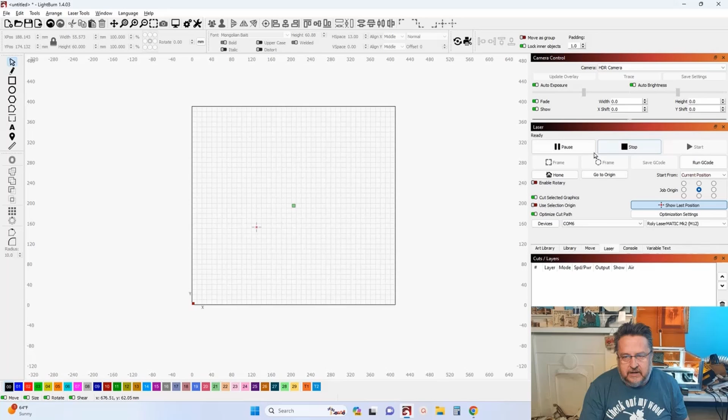First, we're going to talk about setting up the rotary in LightBurn, turning it on, and getting ready to use it. It's really not difficult. First thing you've got to do is get LightBurn opened up. Once you've got LightBurn open, if you have your laser menu open with your pause, start and stop buttons, there's a little switch that says Enable Rotary. You just click that, and now the rotary is enabled. That's all you've got to do—you're ready to use your rotary.

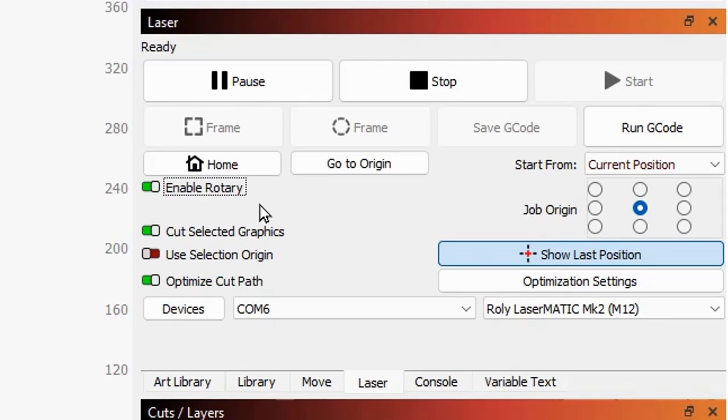Now for positioning the rotary with the MK2 and the chuck, you go to the move menu. In the move menu, you have saved positions. If you do the drop-down menu, you'll have rotary 1, 2, 3, 4, and 5. Those rotary numbered positions are for the friction roller, which has 5 different positions for the roller spacing, and those correspond to the center line for each placement of that roller.

If you're using the chuck rotary, you simply select chuck rotary and say go, and that sends the laser directly to the head of the chuck rotary on its center line. Let's watch that again—I'm going to send it back to home. Now all I have to do is select chuck rotary and say go, and she's at the center position in the chuck rotary, ready for you to send it down the x-axis to where you want the engraving centered.

Now let's talk about that. What is your origin—what are you using? Are you using absolute coordinates, user origin, or current position? Well, let's take a look at each of those.

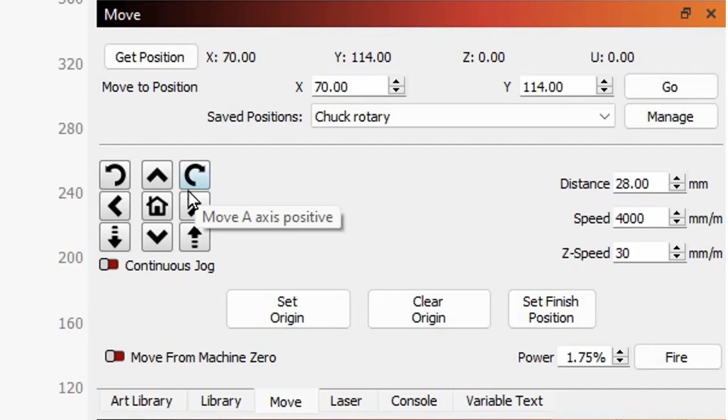So what you have to do is go back to the move menu and use the arrows to control the laser and move that laser head down until you get into the center of the object you're wanting to engrave. So if you were engraving a rocks glass...

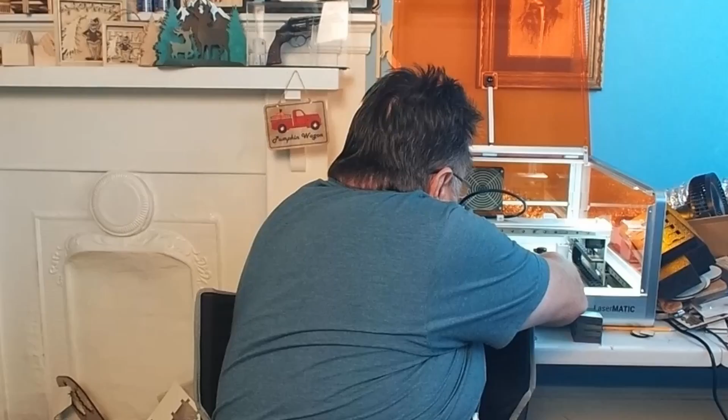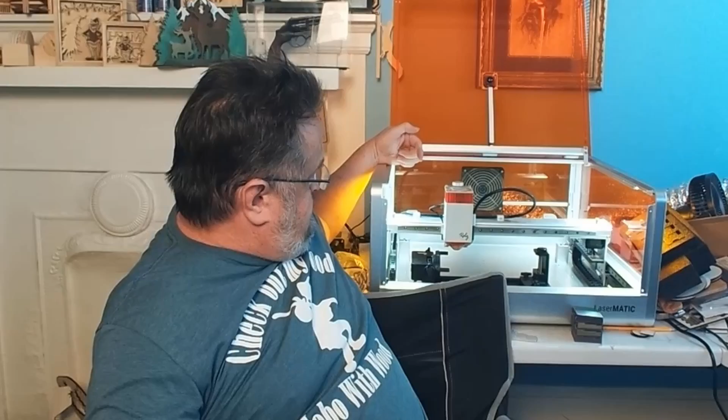She's only going to be 2 inches away from the head of the module, give or take. Of course, you're going to have your engraved surface already chucked up. You're going to use the move controls, using the arrows there, and just start moving the laser down until you get it in the center position on the x-axis of the surface you're going to engrave. Once it's in the center position of where you want that engraving to be, you're ready to start sending the job to the laser.

We're going to get something in there and chuck it up and actually do some engraving here in a few minutes.

Before I go to the chuck, I'm going to need to know some basic things about the piece I'm going to engrave. If I'm going to be doing multiple graphics or a full wrap, I need to know the circumference of this piece. If I've got a limited engraving area, I just need to know what the total length is of the engraved area, so I know where to position the laser for center point.

So first, I'm going to use my fabric flexible ruler to measure my circumference, and I get 24 centimeters, or 240 millimeters.

Now this, they've got some kind of plastic dip or something wrapped around the bottom of it for looks, I guess, so I've only got here to engrave.

So I'm going to measure, and I'm going to put it in the chuck like so. I'm going to measure from the chuck to the plastic to see how big my engrave area is. And that's 10 centimeters, or 100 millimeters. So 240 millimeters, and 100 millimeters. 240 and 100.

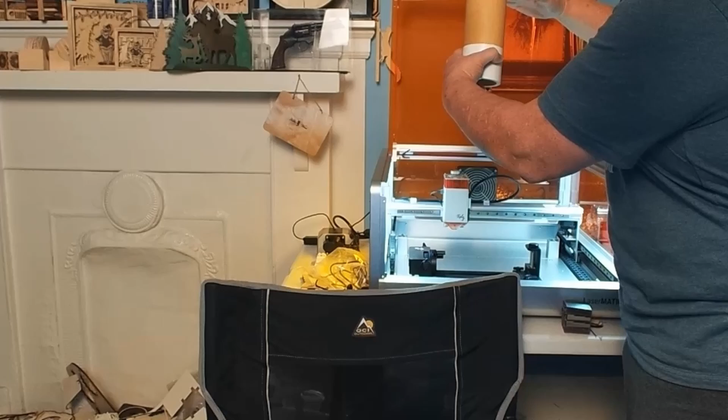So I'm going to put this in the chuck and make sure it's secure against the back of it. Now this thing is not cut level, it's cut at an angle, and I'm going to try and take that into consideration when I'm chucking this up.

I could go to the belt sander and try to level that out.

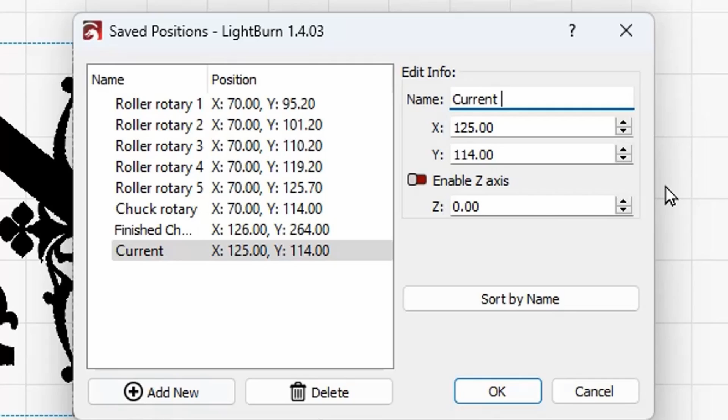I'm going to name this one current start. Now let's say okay. Now if I go Chuck Rotary and say go, that's back to the head of the chuck. Current start - that is now saved. That is exactly where you want that to be on every one you're going to put in this chuck position if you're doing a batch of a certain job.

The next thing you need to do is from this position, if you're using the Lasermatic MK2, I use a value of 150 millimeters. I set my distance to 150, and now I tell it to go due north or straight up the y-axis, and that clears my rotary, clears any job I'm working on, but it also stays away from the lid and the hinge, because depending on the diameter you're working with, you could have this high enough that it could come into contact with the hinge on the lid.

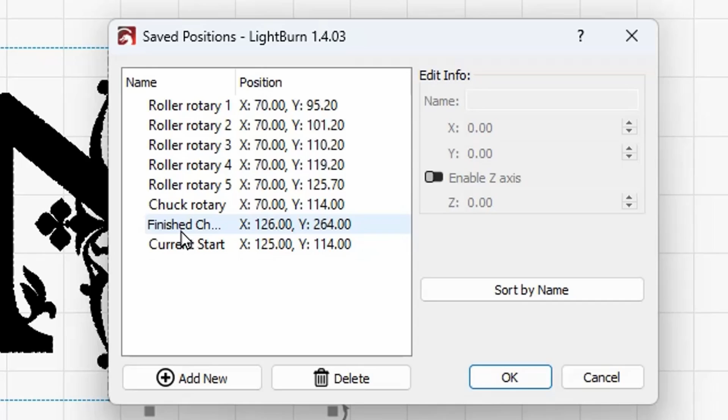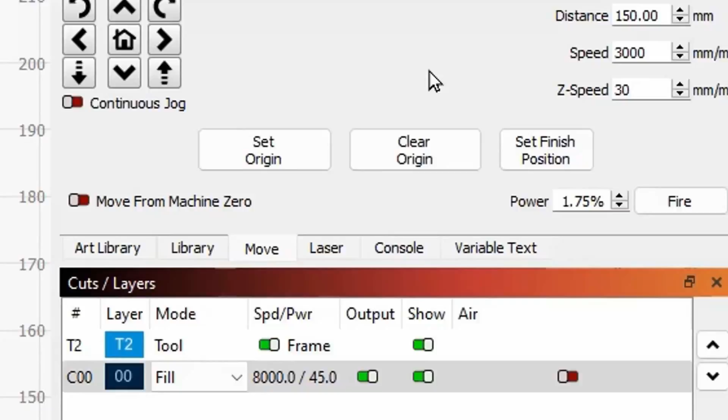So 150 will clear everything you need. Now with that at that position, go right back to manage, and you need to have one created that says finished chuck rotary, then say okay. Now what's going to happen when you run the job and it completes? If you're running in current position, it's going to engrave, and it should come back to the origin, the job origin, which would be in the center. Once that laser is stopped engraving, go right back up to move, and say finished chuck rotary.

And it's going to send that laser up the Y and out of your way. You take your piece out, load your new piece in, come back to save positions, and select current start. And it's going to move the laser right back to where you wanted it to be, like you just had on the previous job. Now all you have to do is hit start. You're ready to go. It's going to finish. Once it finishes, come back, say finish chuck rotary. It's going to clear it out of the way.

So this is when you're doing batch jobs. And really for folks doing a lot of rotary engraving, you're probably doing quite a few batches, lots of the same logos. So this is a huge time saver, definitely super thanks-worthy, especially if you didn't know how to do it to begin with. So set your start position, save it, then create a finish position, working in current position.

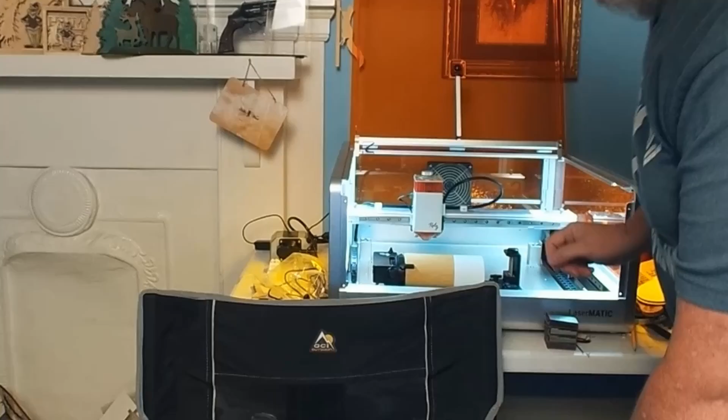That's level. We're going to send it to the start position. Let's see, move. Now that you've leveled it, now you focus it. Do not focus it until you level it.

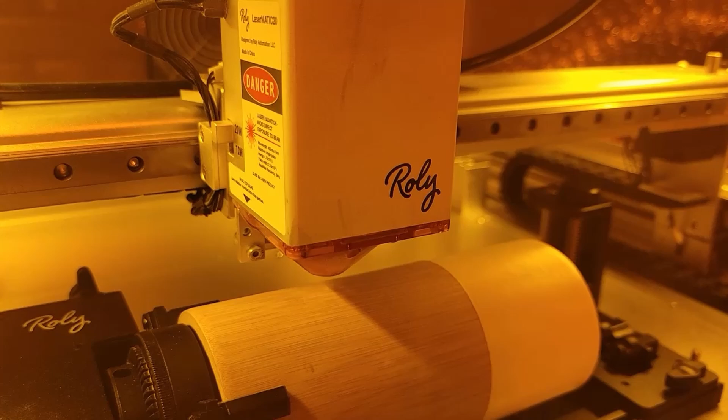Now, you're ready to send a job to the laser. So she's in her start position and ready to engrave. We are going to frame her one last time to make sure everything's cleared. That looks good, and we'll start.

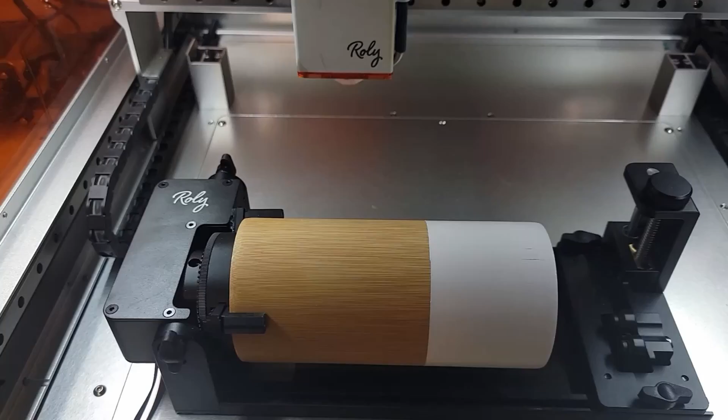Now I'll take that out, put another one in. I've put in the second one, and now I'll need to move the laser from the finish position to the start position so that I can set the focus for this one.

So I will switch hands here. Let's see. Now I'll focus, and it'll be ready to start. So now that that's focused and the lid's closed, all I have to do is hit the start button.

And we're right back in business that quick.

Now, we haven't looked at using values in those calculators that cause irregular outcomes, and that's what we're going to do in just a second. But I got this off the rotary, and just want to show you the finished piece there. Nice engraving, and then 180, we got that.

Now, if you decide that you're going to do some of these bamboo utensil holders, just be aware there's nothing round about these things. And unlike glass figures and the cups and the tumblers, those are going to be pretty much symmetrical, and you can probably 99 times out of 100, if you're going to do two images, do it in one job.

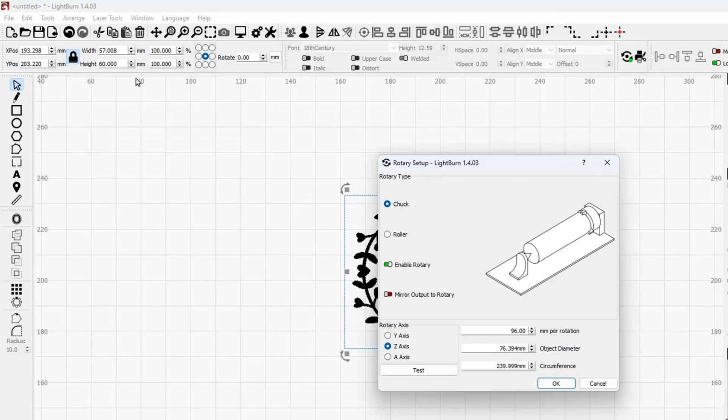If you open up the laser tools and go to Rotary Setup, and you put in 240 millimeters, and you tell it to test - I'm going to open this up so you can see a little bit. When I tell it to test, it's going to rotate completely 360 degrees and then come back 360 degrees. If you put a little tick mark at the top here where you're starting top dead center, you watch that tick mark and make sure it comes all the way back to top dead center, and that's how you know you've got the right circumference.

But it doesn't matter, let's look. Right now I've got 240 in the circumference, and I'm going to hit the test button. So it made a complete 360, moving maybe half an inch or so on the x-axis, and then the full 360 rotation.

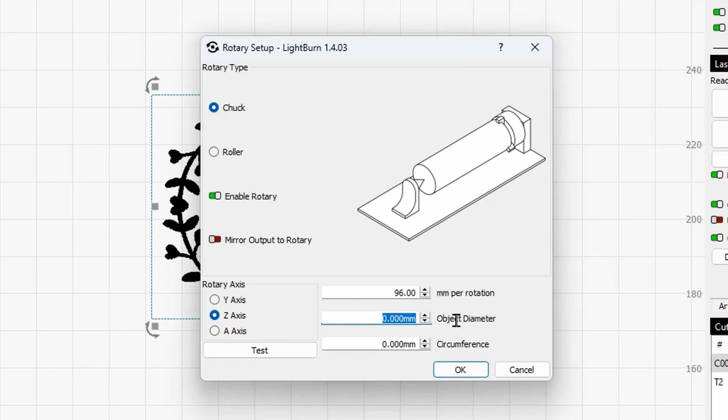Now I'm going to hit cancel, and go back into Laser Tools, Rotary Setup, and we're going to zero that circumference out, and now we're going to put 240 millimeters in the object diameter and tell it to test.

Looks like it has no bearing, correct? And it shouldn't have, according to what they were saying in the live stream. That shouldn't matter. Now let's zero this out.

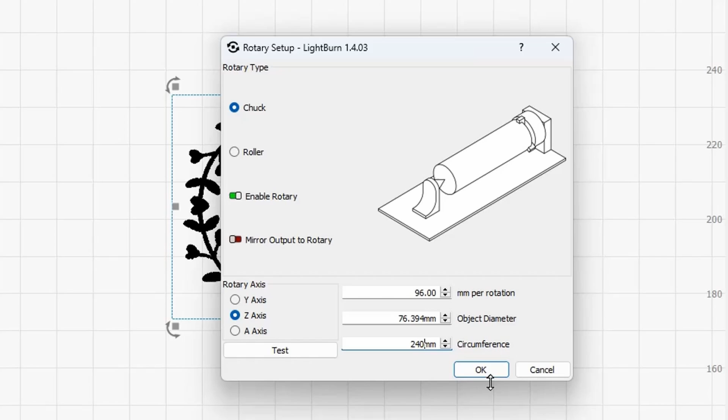I'm going to cancel everything, go back in, and go back into Rotary Setup. Now we're going to put - it didn't matter, zero didn't matter - 240 millimeters in the circumference, and I'm going to say OK.

Now I have my graphic selected, and I'm going to frame it. What we should expect to see is it framed between these two top prongs on the rotary. I wish I had another camera set up to show you, but you should be able to see this. If we say frame, it framed it in that top area, and it took up the full 60 millimeters between those two prongs.

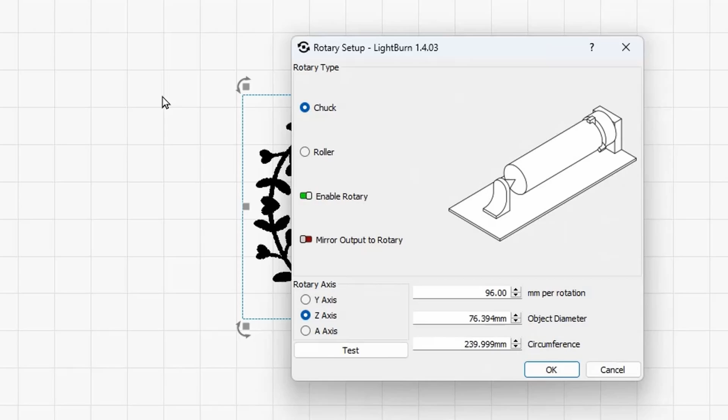Now watch. We're going to go back into Laser Tools, Rotary Setup, and we're going to put 240 in the object diameter. Say OK, and we're going to tell it to frame. There, it hardly moved - it squished everything. Frame.

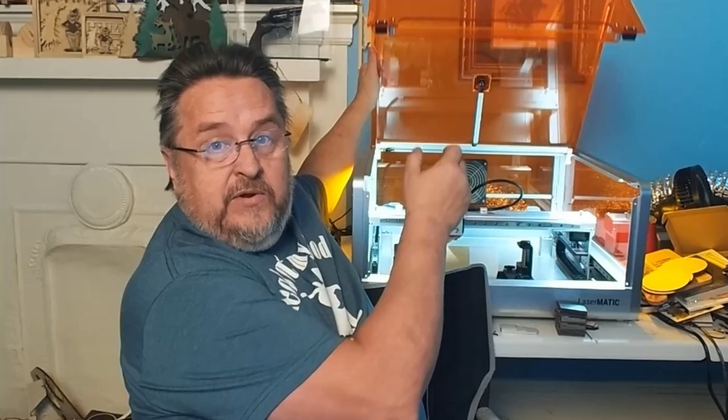So that calculator does affect the outcome in LightBurn. Sorry, Rich, it's not supposed to, but it does. And yes, like we talked about in the live stream, most of the time when there's an error like this or a problem, it's usually cockpit error, or a PICNIC error - problem in chair, not in computer. I put the wrong value in the wrong slot, and that confused things. That's how I've been messing up my images, because I will transpose circumference and diameter, even though I know the total difference - I know what they are.

Many years ago - he's a young man now, but my nephew was 10 years old - we were sitting in a restaurant, and I was telling him which way to go to the restroom. I said go down there, and it's on the right. And he got up, came back and said, Uncle Steve, that's not on the right, that's on the left. And that's what I meant. Then he said, you know how to tell the difference, right? And this is my 10-year-old nephew talking to me. I said, how do you tell the difference? He said, you hold your hands up like this, and the one that makes an L is your left. And I'm like, okay, thank you.

Yeah, I know. But to this day, if I'm giving directions and telling somebody, go down there and make a left - well, I got to figure out something to remind me on circumference and diameter and get that into my head, because I will transpose them knowing fully what they are and the difference, but I'll screw them up every time.

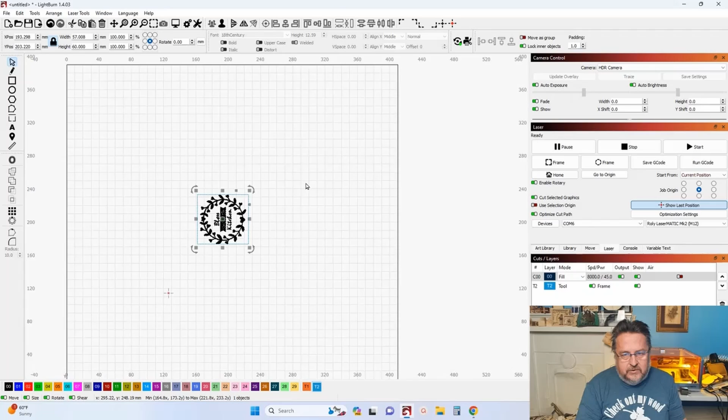So what I can do is go in here to LightBurn, and I'm going to start over here off the work table so we can see it. And I'm just going to draw a square, any square, doesn't matter. Now what I'm going to do is unlock the aspect ratio on it, and tell it the height of that square is the circumference of whatever it is I'm engraving. So it's 240 millimeters in height. That is the total circumference. If you were to take that, cut it out, and wrap it around, they should meet up.

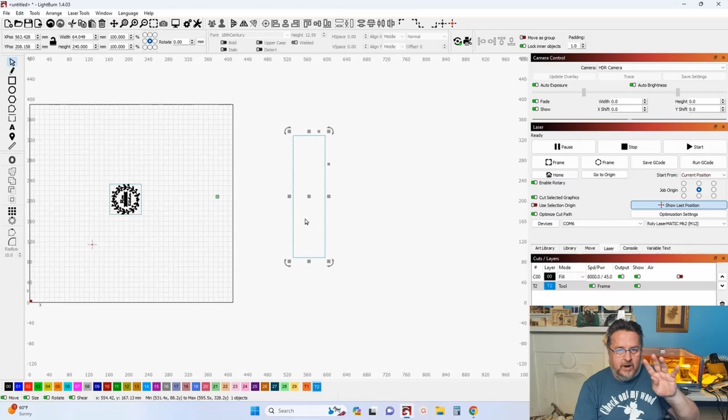So now that I've got 240 millimeters as my total circumference, I need to position two graphics in that area, 180 degrees away from each other. How do I do that? Well, I need two graphics in there and two spaces in between each graphic, one on the left and right of each of those graphics. So I need 4 quadrants, or 4 equal parts.

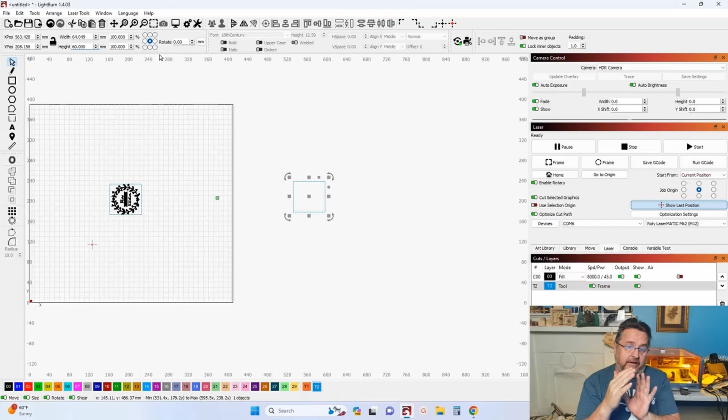So I will simply take that value, 240, and come back up there to my height, and use the division symbol, divide by 4. That tells me I have 60 millimeters in height, which will actually be the width of one of those logos, so I can position 4 of those around it and have them never overlap. But I only need 2.

So now I'm going to create an array. And I'm going to create 3 rows -- well, I need 4 places, right? Yes, if you're going to do 2 images, but watch what I do.

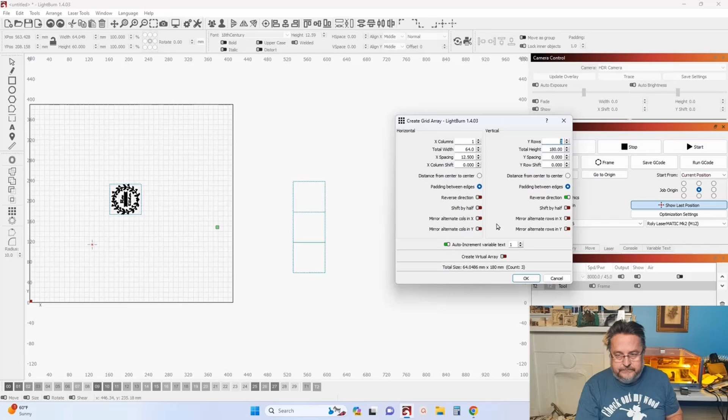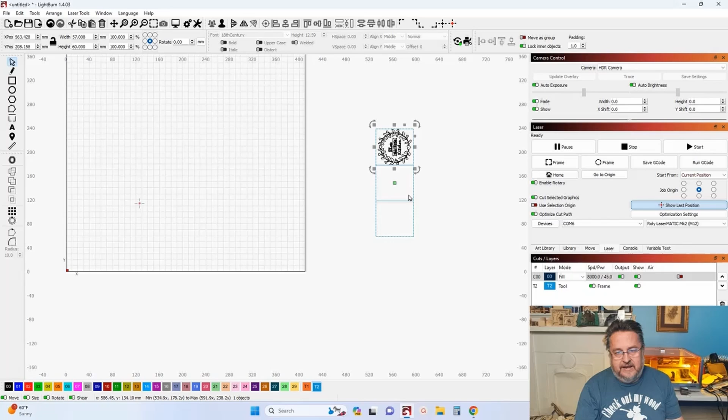I'll take the logo -- let's get rid of this there. I'll take my logo, make sure it's all grouped, and I'll put it right here in the middle of that top piece right there. Now I'm going to create a second logo, and it needs to go 180 degrees opposite. Just to save time, I'm going to duplicate that, then come down here, select this one, and tell it to go to center there.

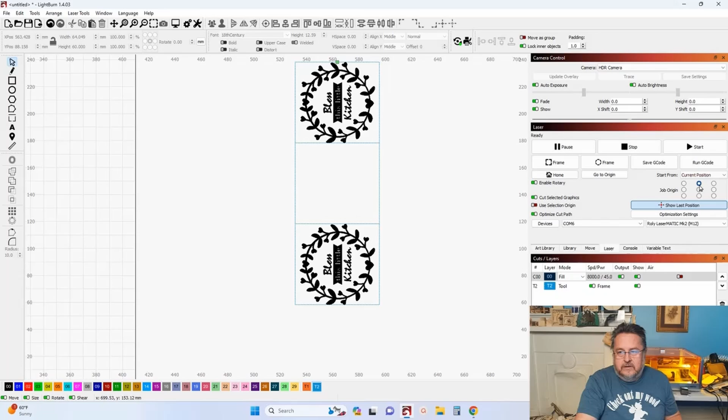Now if you notice, my origin is in the very center right there, and that would work just like it is. I haven't tried it, because what I do is -- see, I've got myself confused, go back to the Laser page. Yeah, they want you working in current position, and it will not send it to center. So I work in user origin, and I put it at top dead center like that. Then I position my piece where I want it to start the first graphic. It's going to engrave it, then it's going to rotate 180 and engrave the next one. That's how I set up a dual logo.

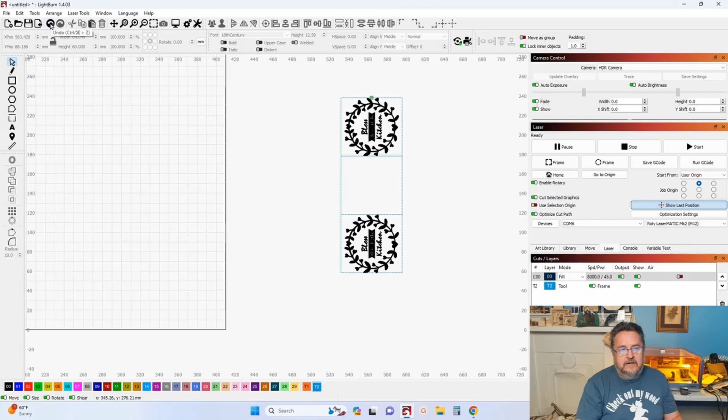Now, in the live stream last night, Rich mentioned that he did 4 instead of 3. I think he said he used the center of them. Let's do array and do 4 rows.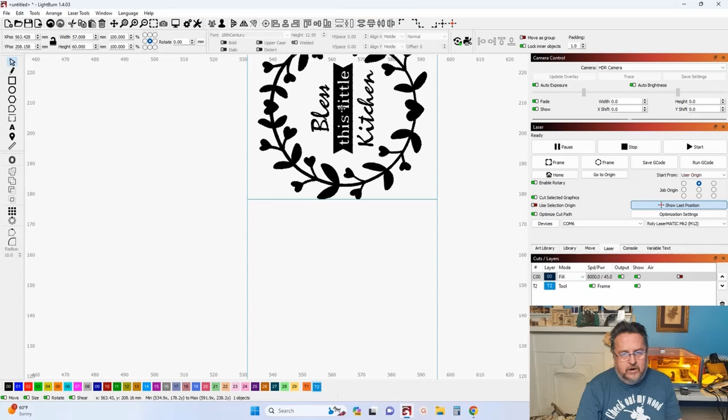From what I understood, he took the center of that logo and dropped it right there on the center of that line. Then Control D to duplicate it, find that center, come down here and drop it right there on the center of that line. That will produce the same thing.

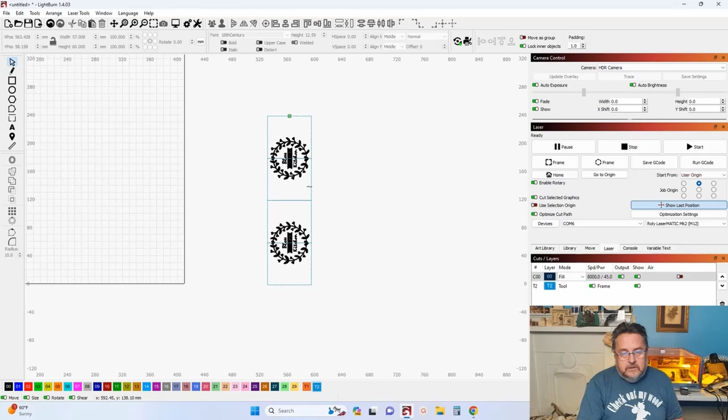So what we've learned here is setting up your rotary, leveling the rotary, focusing your rotary. Speaking of focus, I need to focus this.

Now I can set my image up and do my first image, but because it's that oblong, crazy shaped bamboo, I'm going to do one, set up my next one, re-level it, refocus it, and burn the next one.

So guys, thank you for hanging around. Hope you learned a little something. I learned something, I learned a lot today. I learned don't mess with that calculator, because if you are screwing up like I do and putting the wrong value in the wrong place, it will skew your image and mess it up.

Because I messed up to begin with.